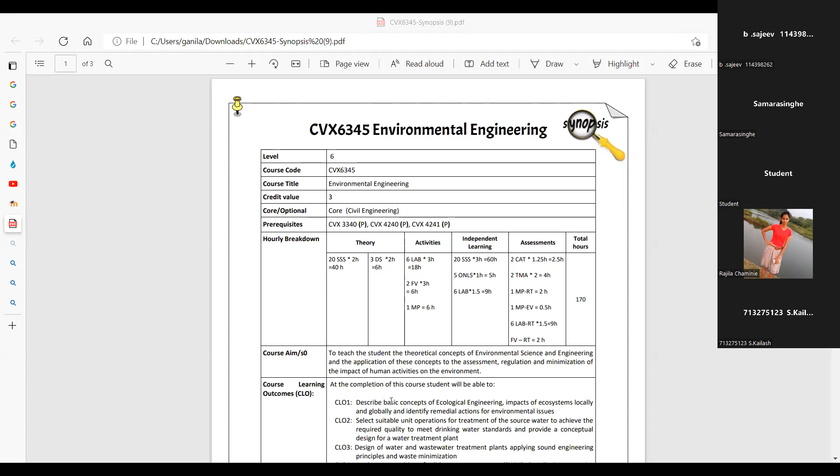Can you see the screen? Can you see the screen? Okay, now this is the course synopsis of your subject, right? I don't know how many of you have seen this. Now, under this, there are several things that you need to do, right? Now, the one thing is to have CAT exams. You can see here, CAT exams.

Then you have lab classes, right? Nearly, I think about 10 experiments we will do to give you an understanding about the subject. Then everybody will have to do a mini project. So you will have to select a topic, an environmental engineering topic, and you will have to perform a mini project and you will have to submit a report.

Then there is a field visit. Last time I had to do it virtually. I had to make a video and do it virtually because of COVID. But this time, due to practical issues like fuel issues, things like that, again, we may have to do it virtually. But I prefer to do it physically because it could benefit many of you. So after doing this field visit, you will have to submit a field visit report.

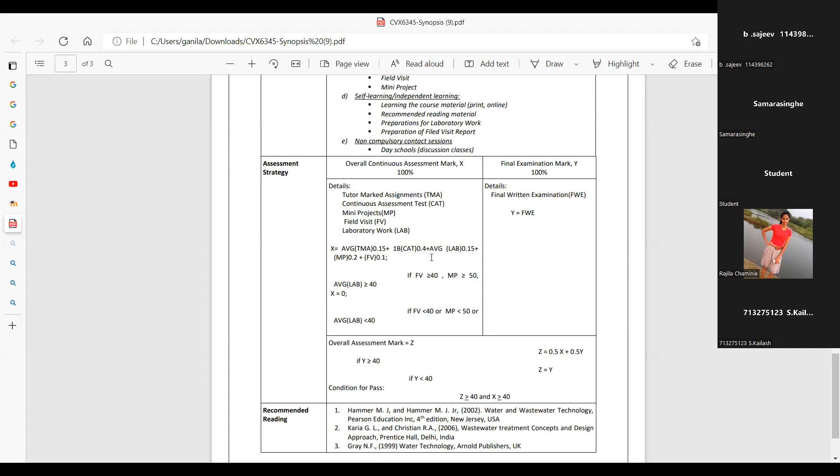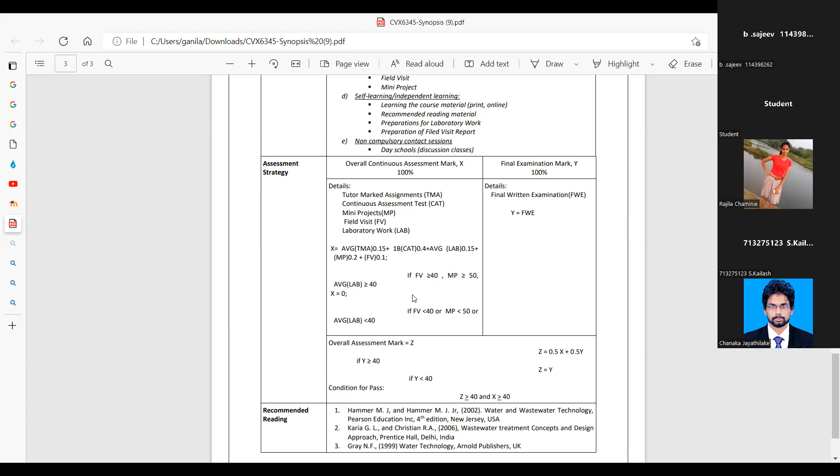So it's not a joke, right? So you have a fair amount of work, you have a fair amount of individual work, and you have to submit. Now, regarding the mini project, I will be giving you a few topics. You can select one topic out of that, and you will have to inform me the topic that you have selected, and I'll give you a deadline to submit.

I think the deadline is already there in the activity diary. I have put it this time. You can see it. Then also there is a deadline for the field visit report. Then there are deadlines for laboratory works. You have to submit on deadline.

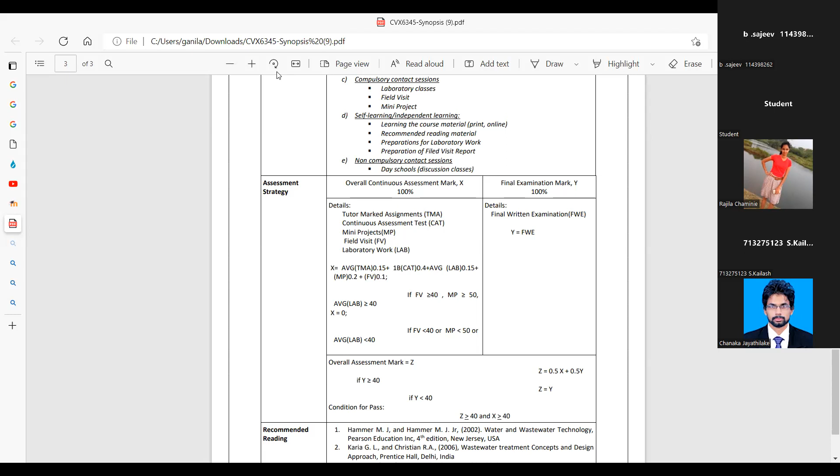This is quite serious. Why I'm saying is that you are supposed to become engineers, so you have a fair amount of working people here. So you know the significance of submitting things on time, right? Now, if you are submitting bids, if you are completing projects, it's quite important to achieve deadlines. So for the freshers who are doing here, who have no work experience, this will be a good exercise.

So I don't need any excuses, I have that and this, because we are going to announce these deadlines far ahead, right? You will have plenty of time. Do not wait until the last moment to submit things, because your deadlines will be deadlines, right? We won't have time to entertain. We are on a very rush program, and please be professionals and try to submit things on time, right? So I'll get into the subject.

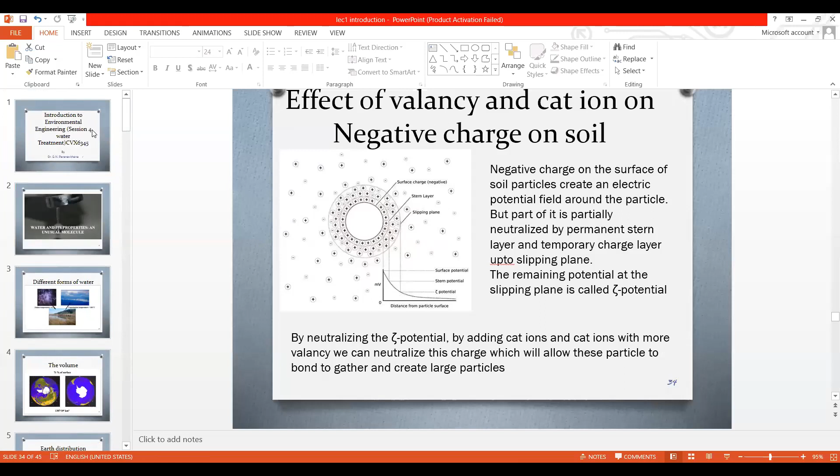Can you see the screen? Can you see the screen? Yes, sir. Yes, sir. Oh, okay, good.

Now, your block 1 contains the ecological aspect of the subject. I will do it later. Definitely, I'll do it within the coming 1.5 months. But I thought of starting it from session 4, water treatment, because it's a very significant and a lengthy session, and especially for you to get the feeling of the subject, I thought of starting the course from this session.

Apparently, I would like to know how many of you are from the water board or any water resources board or irrigation department. Could you please raise your hands? Again, I can see. So I think a few are there, right? So I can see few people are there. So this will be very important for you.

Now, basically in this subject, we will be mainly talking about water, and besides water, we will be talking about air and noise as well. Now, water is a very interesting substance. Without water, we will not survive in this world. Now, water contains very unique properties. Because of this uniqueness of water, life on Earth evolved. That is what scientists say. And because of these unusual properties, it also has a very high tendency to become polluted.

Now, if you look at the temperature of fusion and vaporization of water, it has a fairly high range. Water fuses at 0 degrees centigrade and vaporizes at 100 degrees centigrade. This temperature range from 0 to 100 is quite significant for life to flourish. And without this temperature range, scientists say that the living things on Earth would have never begun. So we will further move into that.

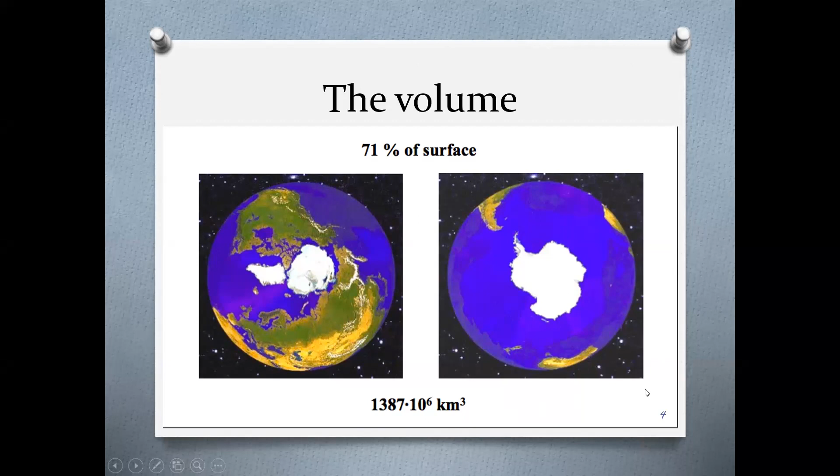Now, out of all of this water, we can use a fair extent of the river water available. We can use lake water. We can use some amount of groundwater, not all. Then glaciers and polar caps, we are unable to use that much. Then of course, ocean water.

Nowadays, we are having treatment systems to use it, but they are fairly expensive. So you can see out of the total available water, there is a very small quantity of water available for human consumption. So it's not a joke. If we run out of water, we cannot survive. In fact, in the coming few decades, there will be war on water. And you can see in the internet the predictions by scientists. So it is fairly important to preserve water and to keep it clean.

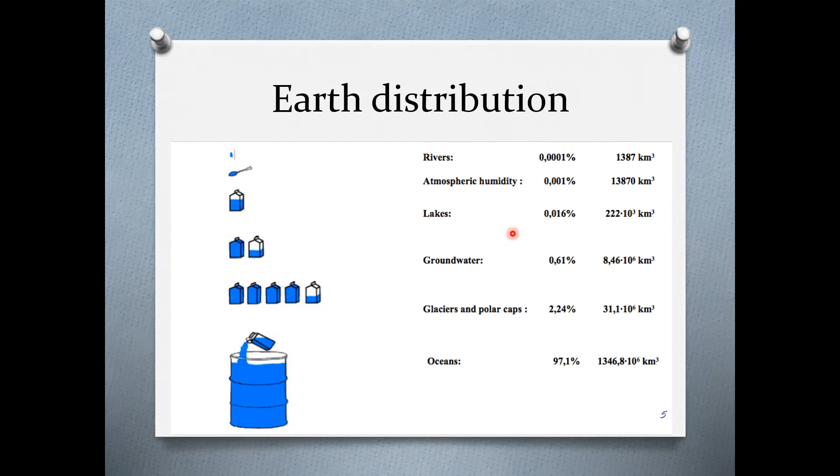Now, I will briefly talk about the hydrological cycle or the water cycle. Hope you have studied this from grade 6 onwards. In fact, we are studying about the cycle in detail at CVX6345.

Can somebody raise your hand if you are doing both 6345 and 4241? Are there any students who are doing both these subjects? No? Okay, good. Now, okay, 6 participants raise hand.

So what we are studying under engineering hydrology is about this hydrological cycle or the water cycle. So we will be talking about that tomorrow. I'll be having a day school tomorrow for hydrology.

Now, if I talk about this hydrological cycle briefly, the cloud formations are there. Clouds get densified and provide rainfall. And this rainfall will be captured by the surface. Part will run on the surface, part will go beneath and will flow laterally to the earth's surface. We call them subsurface flow or interflow. Then part will reach the groundwater table. We will be talking about groundwater table and the type of aquifers and various things under that subject.

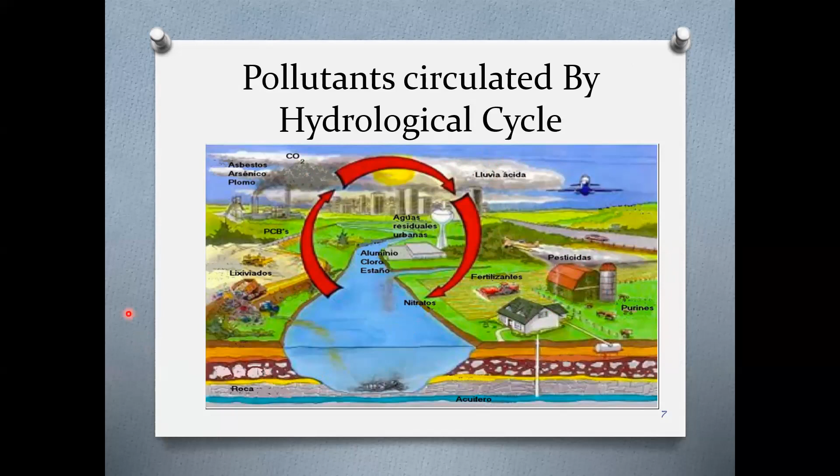Now, this is what I just discussed before. The pollutants can travel with the water cycle. You can see if you dispose contaminants to the ground, it can percolate or infiltrate into the water tables, it can contaminate the rivers, and it can evaporate and contaminate the clouds. If you pollute the air, the polluted air can be trapped in the clouds, and pollutants can come down with the rain, can harm your farm fields, can harm your health, can harm your food supplies. So they are all interconnected, right?

Now, let us briefly talk about the sources of water pollutants. If you look at the sources of water pollutants, you can basically categorize them into two categories: natural and anthropic origins. Natural, of course, you know what natural means. Anthropic means human-based or human-produced origins or human-created causes.

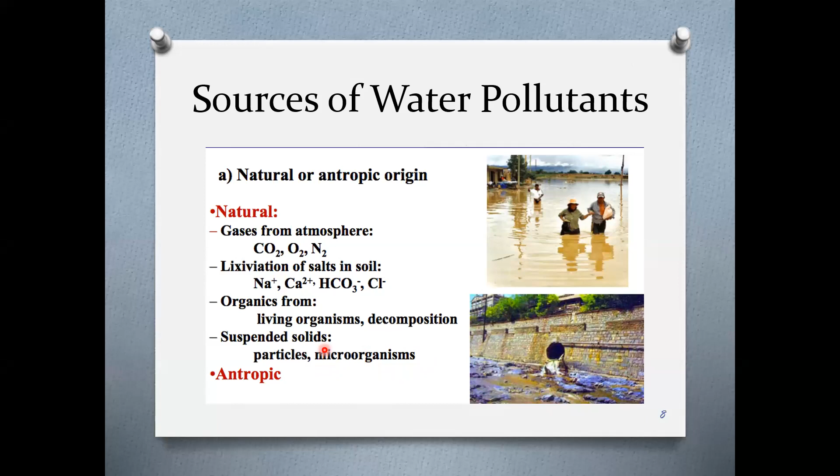So, when it comes to natural sources, especially gases from the atmosphere, and then lixiviation of salt in soil, this is accumulation of these ions, cations and anions, on soil. Then organics from living organisms, decompositions, things like that will produce pollutants. Then when rainwater erodes surfaces, it can create suspended solids and particles, and harmful microorganisms could be captured in these particles.

Then when it comes to anthropogenic reasons, we do these basic activities with water, industrial productions. Then we do discharges from municipal and domestic wastewater. Then we have discharges from farming and fishing. And you can see the contribution from each sector to the pollution. In fact, industrial production contributes 20% of water pollution. Then municipal and domestic wastewater produce 10% of water pollution. Then the major cause of water pollution is farming and fishing activities.

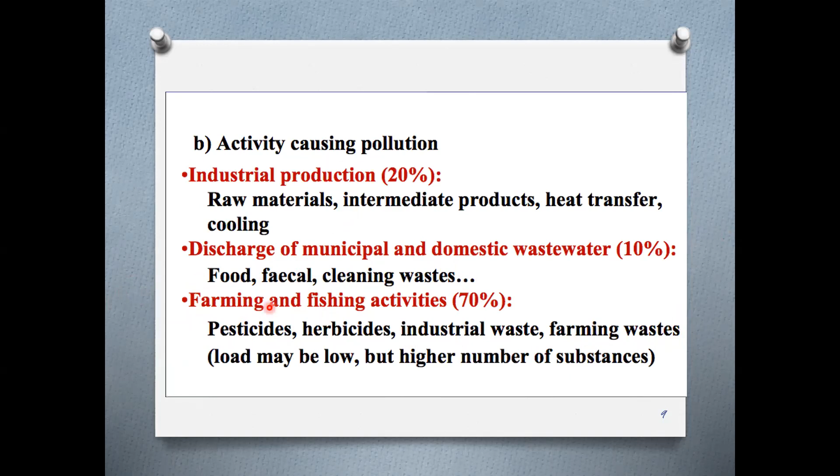Now, especially in industrial production, the formation and extraction of raw materials, then the intermediate production, the heat transfers to cooling and cooling towers, you know what is happening at Norochcholai, things like that can be considered as pollution for water. Then discharges from municipal and domestic wastewater: the food, fecal and cleaning waste. Fecal means our night soil contaminants can create water pollutants. Then from farming and fishing, especially pesticides, herbicides and industrial waste, farming waste create pollutants to the water cycle.

Now, if you look at the type of sources based on the geographical origin, we can divide them into two categories. The one is called point sources. The other one is called non-point sources. Now, point sources, for example, localized industrial discharges. You might have a factory which uses water and produces wastewater. It might be discharging that wastewater at one location. So it is at a point. So the pollutants are coming into the environment at a point. So those sorts of sources are called point sources.

Now, when you go into non-point sources, especially fertilizers and herbicides, especially agrochemicals, they are non-point sources. When you apply them to the environment, the pollution can take place at several locations. So you cannot pinpoint one point. So that's why we call them non-point sources. In fact, dealing with non-point sources is much more difficult than dealing with point sources.

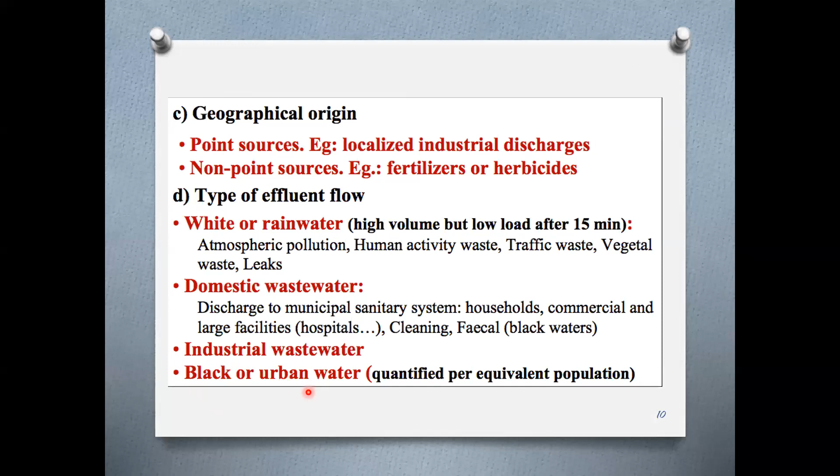Then when it comes to black and urban water, black water is specially used for water that is contaminated with fecal matter or urine. So those are called black water. Now, let me summarize the water pollution that we were talking about. Water pollution can be in the form of fuel and oil discharges. Then it can be in the form of domestic, agriculture, food industries, and then it can result from agricultural products, pesticides, fertilizers, then heavy metals and industrial waste can cause water pollution.

So these are the basic effects of these different categories of contaminants. Then flotation and low degradation due to these types of pollutants, then deoxygenation, the removal of dissolved oxygen from water, can take place due to this type of waste. Then lake eutrophication can take place due to this type of waste. Then, of course, the water can become very toxic and very harmful if we have this waste in the water.

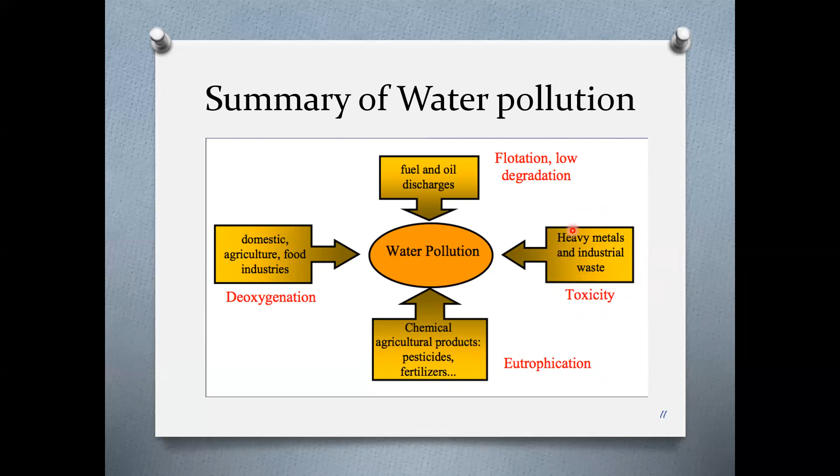Now, let us briefly talk about the objectives of this session. The objectives of water treatment for domestic consumption. To provide water free from these factors: visible suspended matter, color, taste and odor, objectionable dissolved matter, bacteria indicative of pollution, aggressive constituents. Now, why don't you like visible suspended matter? Would you be willing to drink water with a lot of suspended matter? No, right? Nobody is willing to consume or use water with a lot of suspended matter. So that's the issue.

Then color, odor, and taste. It should not have undesirable color, taste, and odor. Then it should not have objectionable dissolved matter. We will be talking about dissolved matter later. It could have certain chemicals dissolved in it which could harm our health. So it should be free from objectionable dissolved matter.

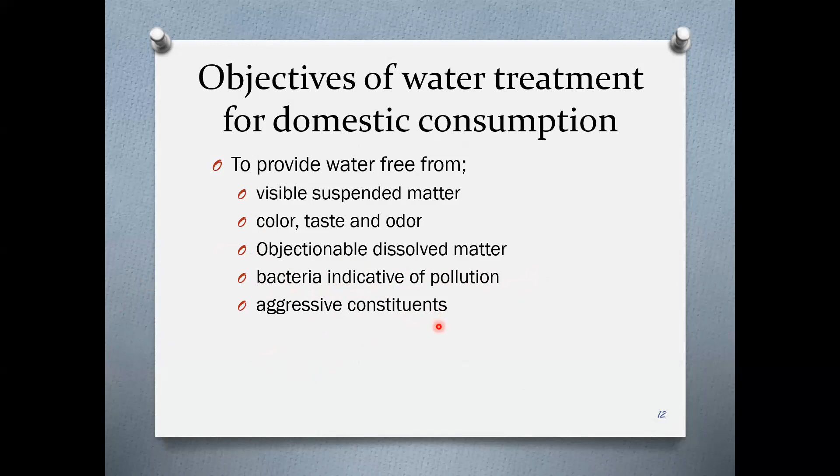Then bacteria of harmful nature, or indicative of harmful substances, should not be there in the water. Then aggressive constituents, the things which react fast. Let's say alkalinity, acidity. If you have too much acidity, it will corrode your equipment, your utensils. Now, let us briefly talk about the ways and means of measuring pollutants.

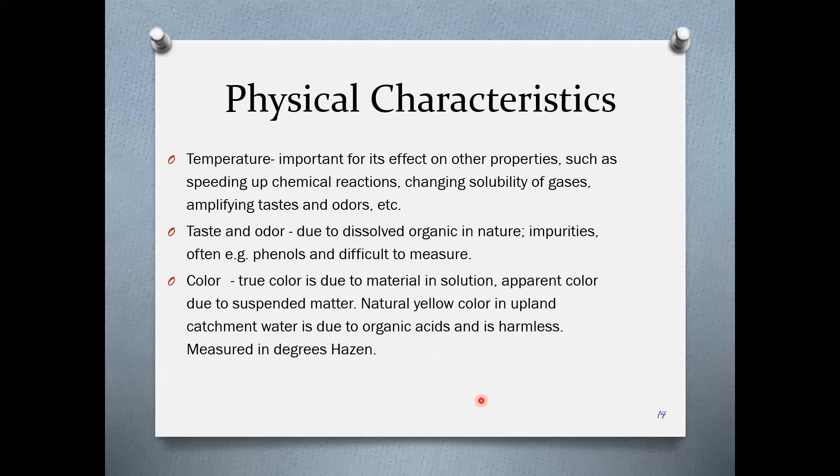Now, let us talk about the property turbidity. Turbidity is a fairly significant one, and we do a fair amount of work to reduce turbidity in water treatment. Colloidal solids give water a cloudy appearance, aesthetically unattractive and possibly harmful, maybe due to clay and silt particles, sewage, industrial waste, or microorganisms. Turbidity means unclear water. It is not transparent, you cannot see through it. When the transparency goes down, the turbidity goes up.

So it's a fairly important one, because if the water is turbid, it could mean it is containing any of these substances. And if it has mud particles, the problem is that they can hide harmful bacteria and viruses. So it is very important. In fact, in a treatment chain, there is a significant component dedicated to removing turbidity.

Well, the other parameter is electrical conductivity, which depends on the quantity of dissolved salts and is approximately proportional to TDS, total dissolved content. This TDS refers to the salt content in the water. If the electrical conductivity is very high, it can have very high total dissolved solids. If the dissolved content is very high, it could harm our crops, our soils, and ultimately ourselves. So measuring electrical conductivity is also fairly important.

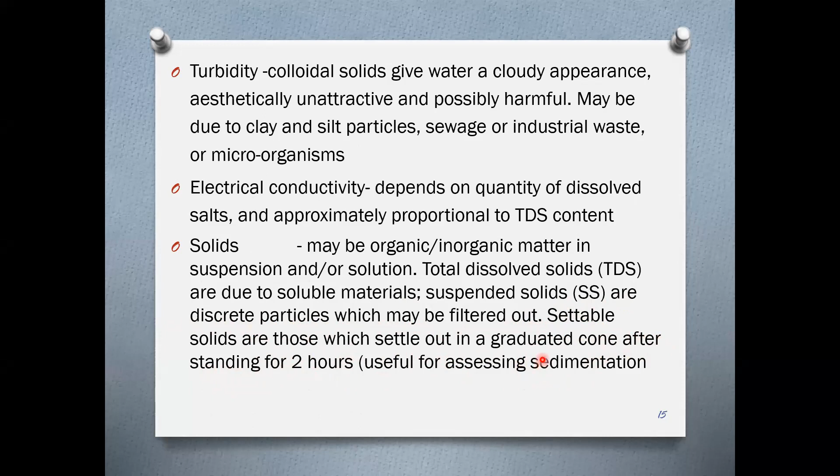Now, let's go into chemical characteristics. pH, of course, indicates the alkalinity and the acidity level of water. Alkalinity is due to the presence of bicarbonates, carbonates, or hydroxide. It is useful as it provides buffering to resist changes in pH. Now, if you have high alkalinity, it could resist changes, right?

Then acidity, especially if water becomes acidic, if you have too much carbon dioxide dissolved in it. When you dissolve carbon dioxide in water, it will create carbonic acid. So basically, these sorts of ranges are present in natural waters. Then there is an acidity called mineral acidity. This is usually caused by sulfuric, hydrochloric, and nitric acids, and would normally be due to industrial waste.

Now, if you have industrial wastewater discharges into water, if the pH level is below 4.5, it's a clear indication of industrial contamination. Normally, it is measured in milligrams per liter equivalent to calcium carbonate. Now, when it comes to hardness,

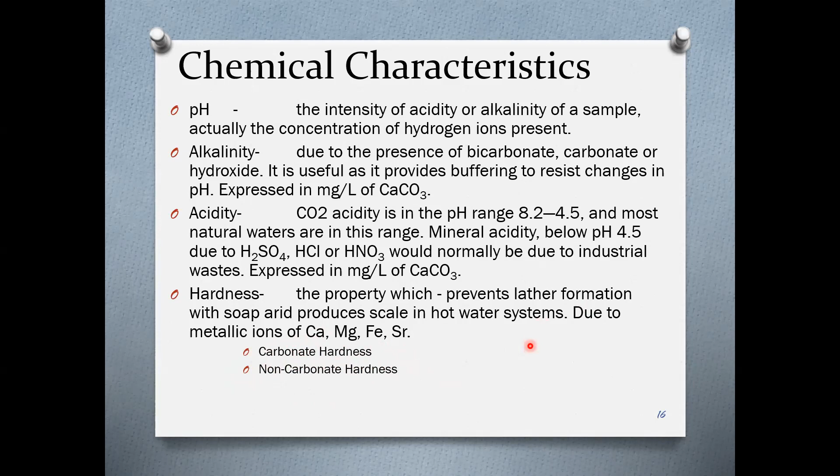Hardness is of two natures, carbonate hardness and non-carbonate hardness, which we might be dealing with extensively later. Carbonate hardness means the hardness by cations with anions, carbonates and bicarbonates. Non-carbonate hardness means chloride, nitrate, and sulfate hardness. So further, these chemical characteristics are going to be there.

Then this one is a very significant chemical parameter, dissolved oxygen, required for maintaining higher quality of biological life in water. If the dissolved oxygen goes below a certain level, the fishes and all the other living beings in that water will die. So it is fairly important to maintain very high dissolved oxygen. Further, in drinking water, if you have a high amount of oxygen dissolved, it will prevent other substances from occupying interstitial spaces, right?

Now you have water molecules, and you have interstitial spaces among these molecules. If you have a high dissolved oxygen level, it will reduce other substances getting dissolved and getting into these interstitial spaces. The other thing, dissolved oxygen will improve the taste of water. Then nitrogen, it is present in 4 different types. You can read it from your notes, and it will come up later.

Then chlorides give a brackish taste and may be an indicator of sewage pollution due to the chloride content of urine. If you have a high content of chloride, it means it has a definite sewage contamination. It is detectable at about 250 milligrams a liter upwards.

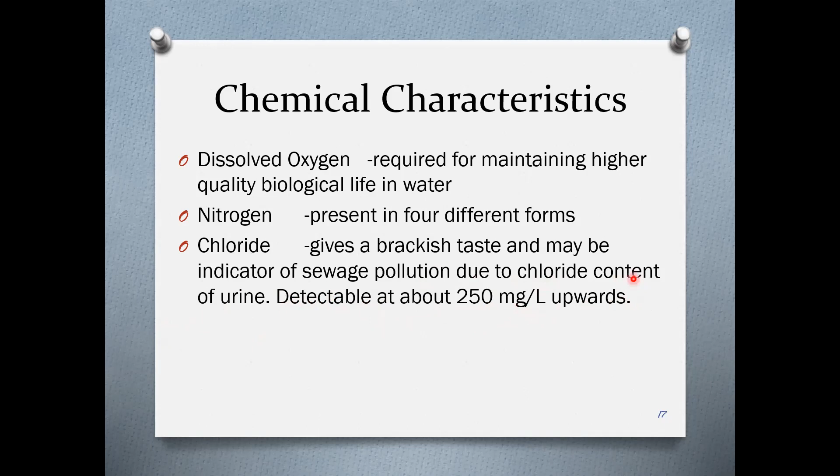Now, before moving into water treatment systems, we have to discuss a few things about forecasting water demand. In order to design a water treatment facility, we should predict the future demand for water caused by population growth. There are two models to predict the future demand, namely the linear model and the exponential model.

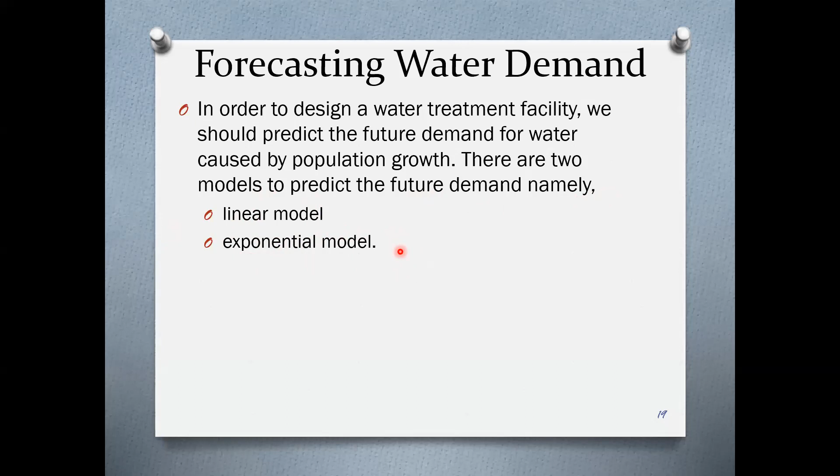Now, when you are making a water treatment plant, you have to make a water treatment plant to cater future demand. So you have to decide whether you are going to get 30-year predicted flow demand or 25-year predicted demand. But to predict, there are two types of models. One is the linear model. You can see the linear growth with years. And this one is the exponential model. I have taken down this section from the design manual of the water board. And you can see, basically, we generally use this exponential model.

Now, if you look at the exponential model here, Pn equals P into 1 plus R to the power N. P is the base population. Let's say we are talking about 2022. If the population is 100,000 in the command area, you can apply this equation and find the population in 30 years time. So this R is the growth rate. It was given as 2.3, and the manual that I was using was a pretty old one. In fact, these growth rates have come down significantly. I think it's close to one or something in Sri Lanka now.

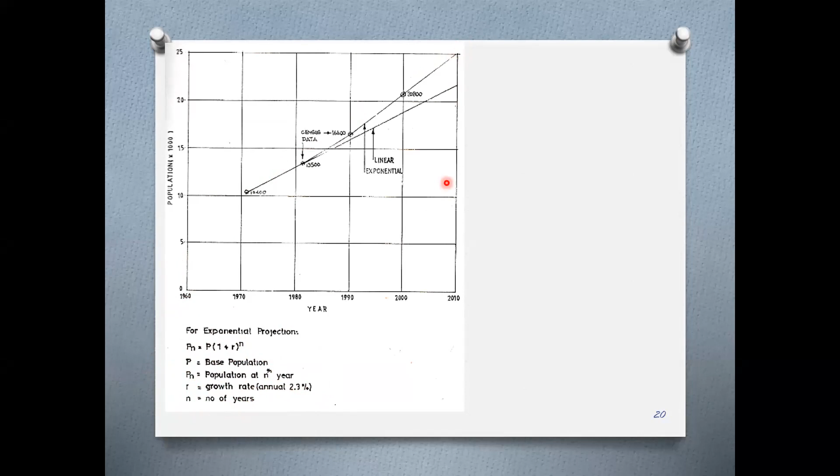Then you can substitute the number of years. So you can predict the population in 30 years or 25 years. For that population, you have to design the water treatment plant, your water treatment system. Then, steps in determining the water demand. There are several steps in determining the water demand. Now, the first step is to select a per capita water demand.

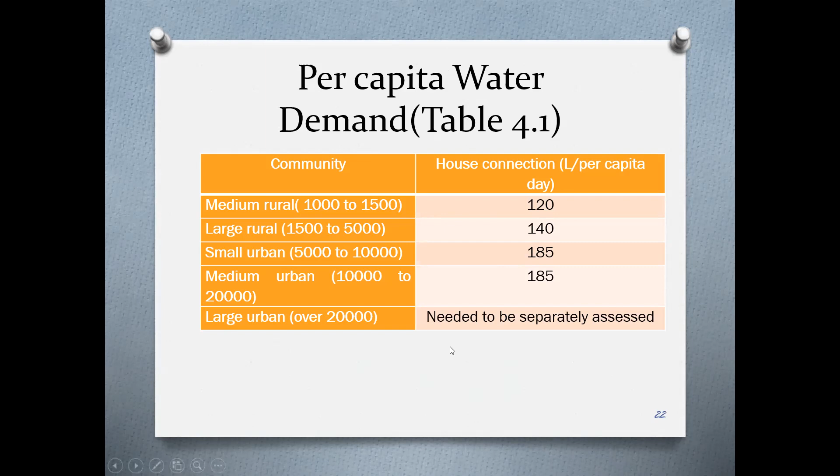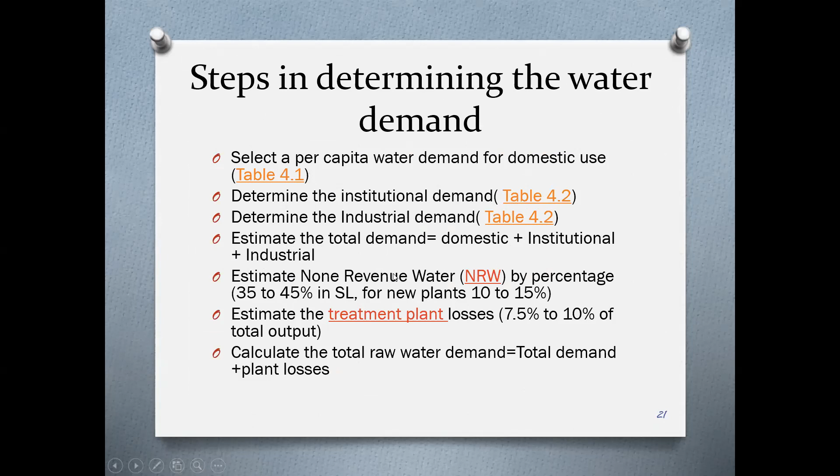Then you have to estimate the total demand. You have to add the calculated one for domestic consumption. Then you have to add the calculation for industrial. Then you have to add the calculation for institutional. So you will get the total demand. Now, on top of this total demand, you have to estimate the non-revenue water. Now, this non-revenue water is an interesting thing. I will talk about it.

Now, I'm quite sure you have experienced such things in our water system. You might have experienced water leakages in our systems. These are all non-revenue water. What do you mean by non-revenue water? It does not generate any revenue to the institution or the government. These are just leakages. For example, I know some time back at Peradeniya University, the water bill during the holiday months and working months was the same. You cannot have a water bill during holiday months and working months the same.

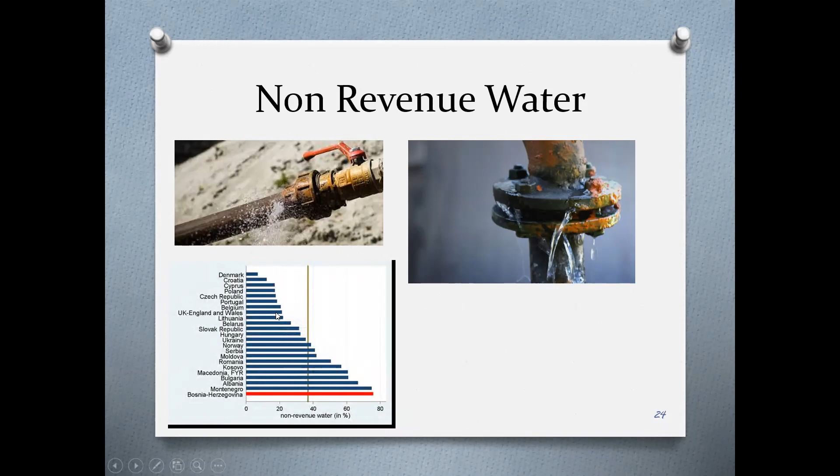Then I will move into the water treatment plant.

For that, at this moment, I would like to take a 10 minute break. I will try to share a video for you. Please watch during this 10 minutes time. 1 second, please.

Okay, I'll share this small video. Please watch for a break.

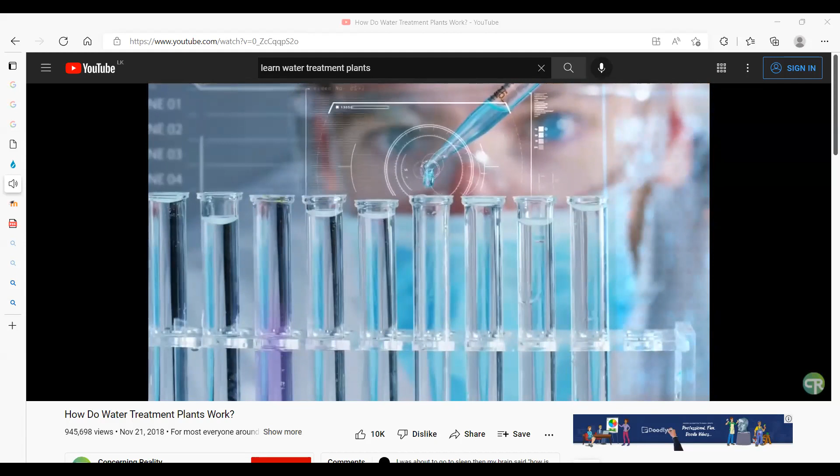The question still remains, how exactly does one treatment plant take dirty river water or well water and turn it into water that is safe to drink? It involves a lot of processing, using chemicals, filters, and removing all of the toxins and hazards from a given source. The entire process starts with something called coagulation and flocculation.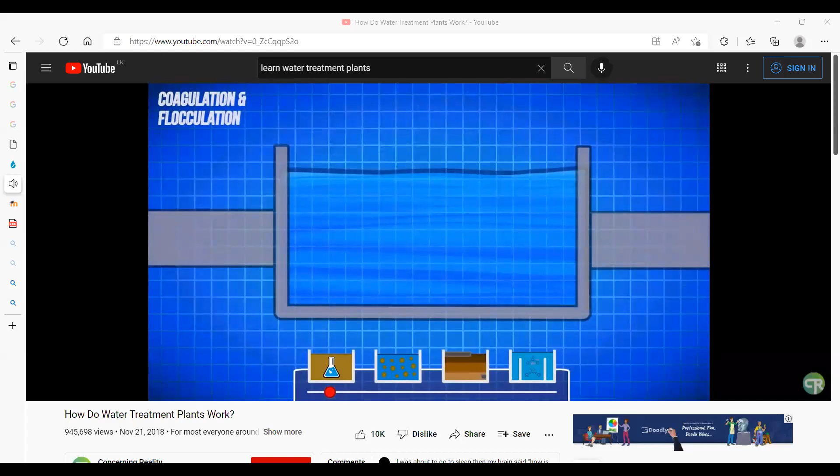All drinking water has to come from somewhere, usually being freshwater lakes, rivers, wells, or streams. In these water sources, there's going to be some amount of sediment as well as organic materials in the water. These particles of sand, bacteria, dirt, wood, etc., they all have to be removed before the water can be sent out to city residents. To do this, chemicals called coagulants are added to the water.

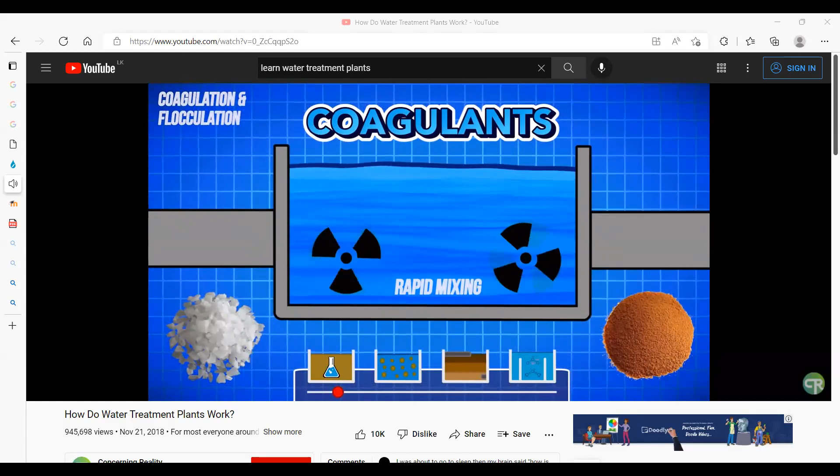These chemicals, such as aluminum sulfate or ferric chloride, work to help the particles in the water congeal together. Essentially, these chemicals have the opposite charges of suspended solids, like clays or silts. When combined, the charges of the particles are neutralized, allowing for them to stick together.

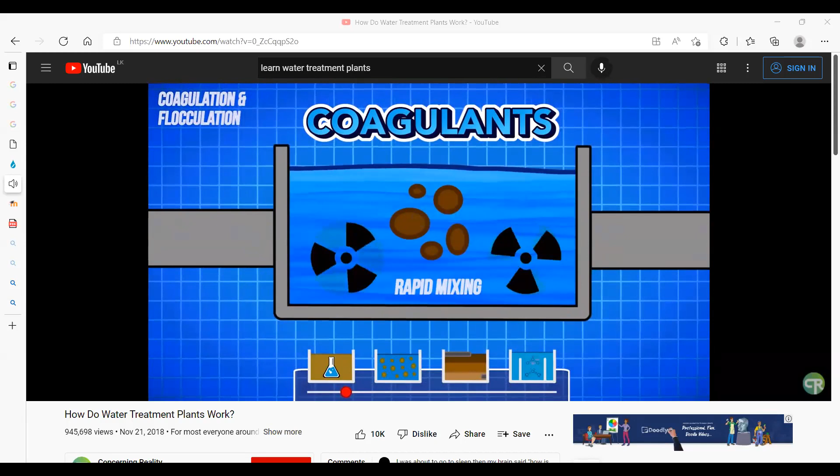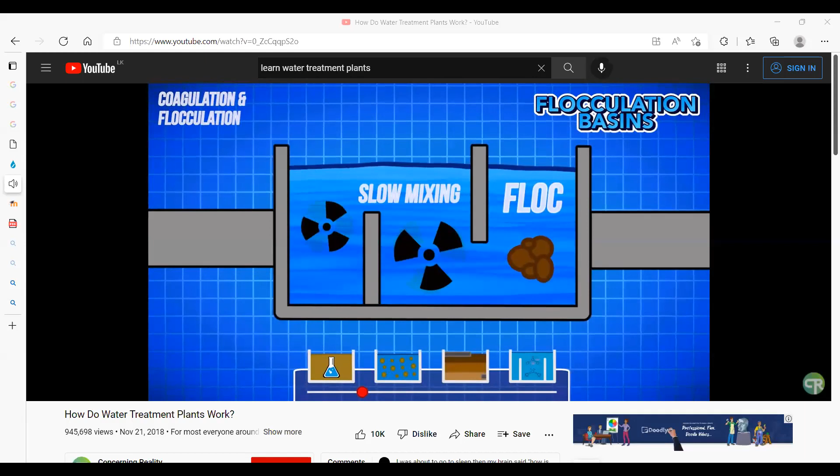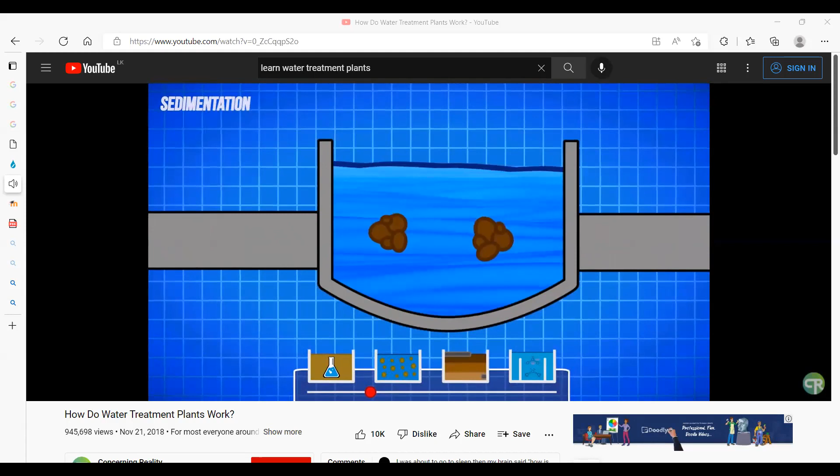Coagulants are often added to the water right at the inlet of a drinking water plant, where the water then goes into mixing basins called flocculation basins. In these basins, the solution of water and coagulant will slowly be mixed together to form what are called floc particles. After mixing for a set amount of time determined by water quality in the flocculation basins, the water is moved to sedimentation basins. It's in these holding tanks where the water sits for the floc particles to begin settling out at a faster and faster rate, which is the intended goal of this process.

By simply adding and mixing these chemicals into the water and letting that water sit, a large portion of the sediment will settle out to the bottom as sludge, which can be taken away to a landfill or holding facility. The floc particles are ultimately removed from the bottom of basins, and the clean water, being the cleanest at the top due to the settling particles, flows over weirs to the next stage in the process.

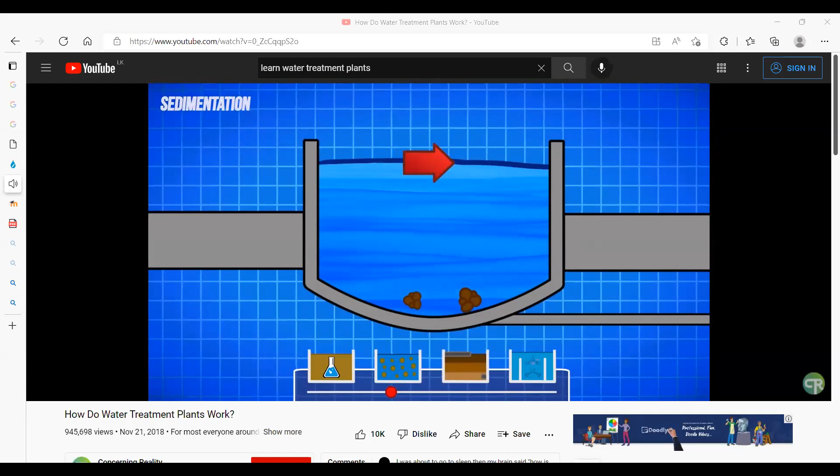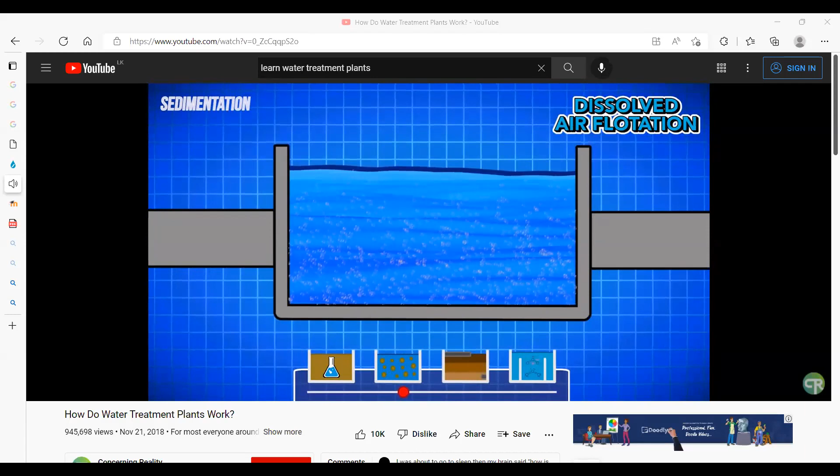In some plants, engineers actually use dissolved air flotation tanks in place of sedimentation basins. In these cases, air is pumped into the bottom of the tanks, creating a cascade of tiny bubbles. As these bubbles float to the surface, they take floc particles with them, forming a film of floc on the surface of the tanks. Then, a sweeper arm pushes the floc into a collection basin where it's taken to a handling facility. In dissolved air flotation tanks, the clean water is taken from the bottom, where the least amount of floc is.

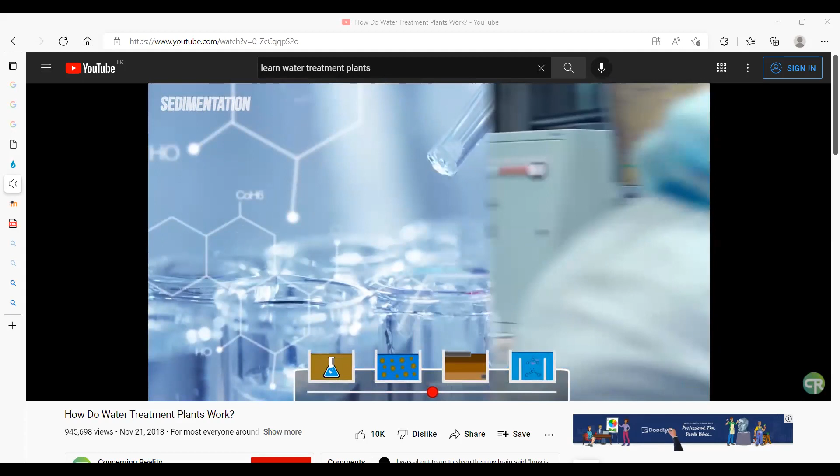When it comes to designing water treatment plants, engineers will vary techniques based on the water source and how they want their final water to taste, feel, or otherwise be treated. The only regulation is the quality of water being pumped to the city, and in most cases, it doesn't matter how plants get the water to that point, which allows civil engineers a lot of creative freedom in the process.

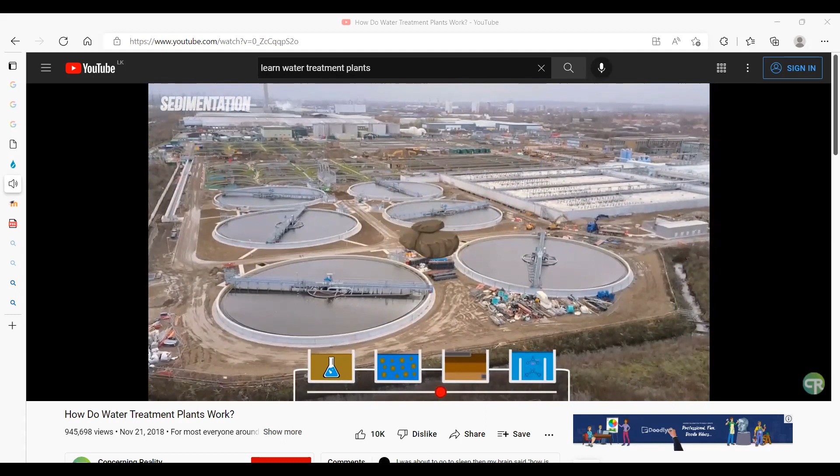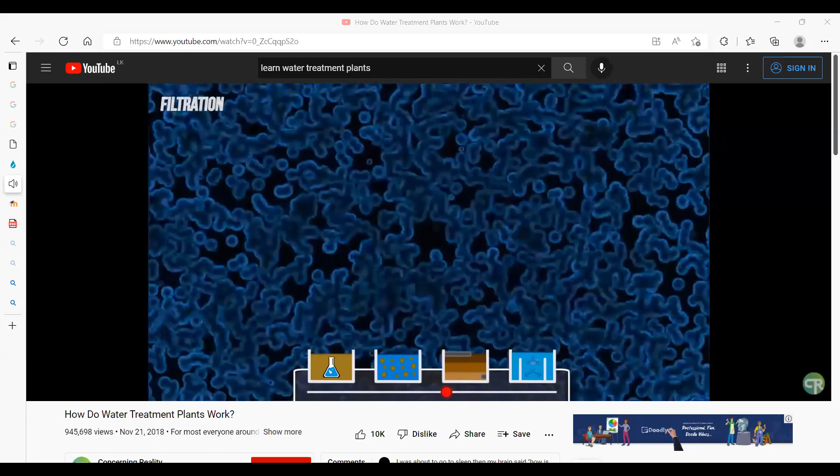After the majority of solids are removed from the water during coagulation and flocculation, followed by sedimentation, the water flows over weirs to the next step, filtration. The water at this point will start looking clear, but there will still be bacteria and very small suspended solids in the mix. The filtration process will seek to remove the remainder of the suspended solids and bacteria to further bring the water up to snuff. Nearly every potable water treatment plant will use a sand filter for this process.

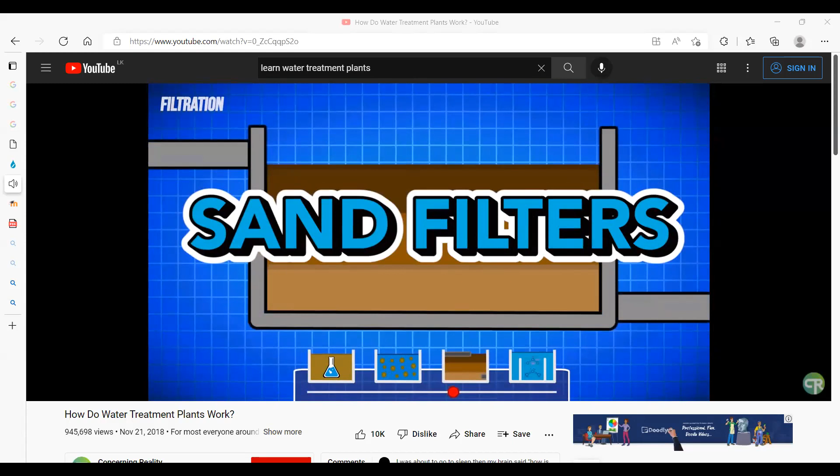Even in plants where engineers may not think it's needed, often sand filters will be added simply for extra measures to ensure clean water at the end. Sand filters are exactly what they sound like, a basin of fine to coarse sand that filters water. It would theoretically be possible to treat drinking water with only sand filters, but that would result in frequently clogged sand filters, resulting in lower efficiency and more cleaning time.

These sand filters can be set up in essentially two different ways. Either the water flows from the bottom and exits the top, or the water flows from the top and exits the bottom. Each layout presents its own set of unique problems, but the most common technique is actually for the water to flow from the top to the bottom. Sand filters aren't highly technical. Water just passes through them and particles get caught as they run out of space to flow through. However, while not highly technical, sand filters are highly efficient.

Water flowing out of sand filters will need to have a clarity of around less than 0.3 nephelometric turbidity units, or NTU. Try saying that 3 times fast. Or whatever local code is used for water clarity. This measurement is essentially just a way to determine the number of particles still remaining in the water, or turbidity.

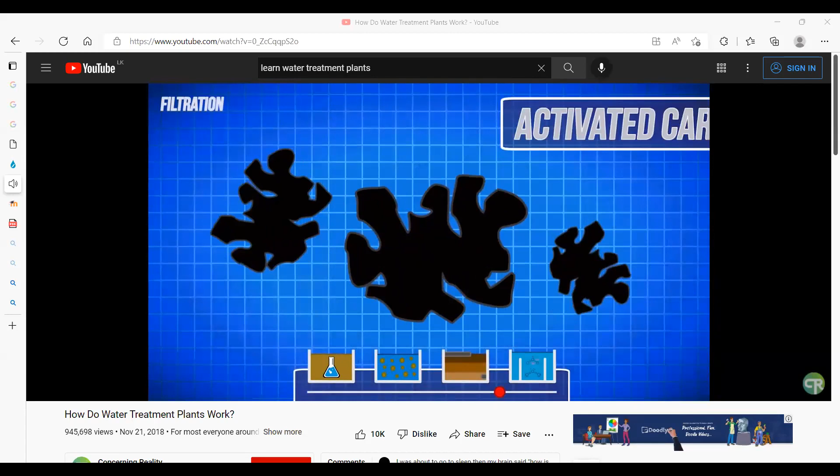Many treatment plants will also pass water through activated carbon basins, which you can essentially think of as giant Brita filter tanks. Activated carbon particles have hundreds of tiny pores on them that help remove the tiniest of sediment and bacteria. This process isn't wholly necessary, but it helps improve taste and odor, often a desired trait for city residents. At this point, the water should be mostly crystal clear, but there still remains some residual bacteria. That leads us to the next step, disinfection.

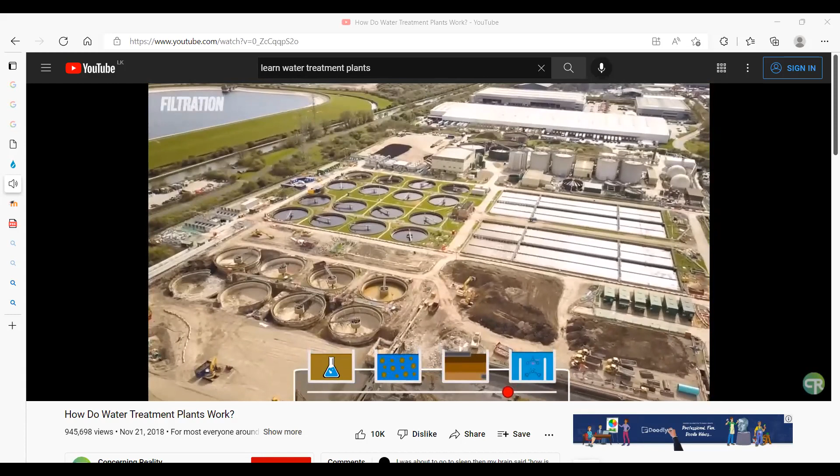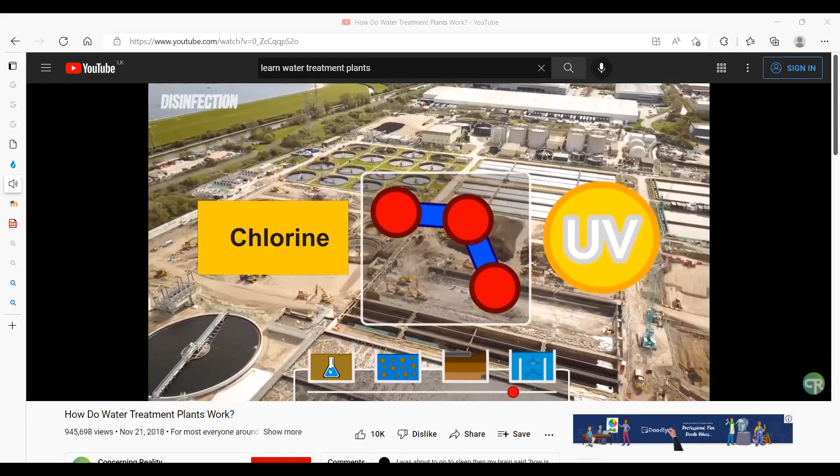There are 3 main ways of disinfection in the water treatment process, which can be used individually or in combination with one another, depending upon design. First, chlorine or chloramine treatment, there's ozone treatment, and finally, ultraviolet radiation treatment. In the US, the main method of disinfection is by adding chloramines, or chlorine-based compounds. These compounds, such as chlorine dioxide or monochloramine, work to kill microorganisms.

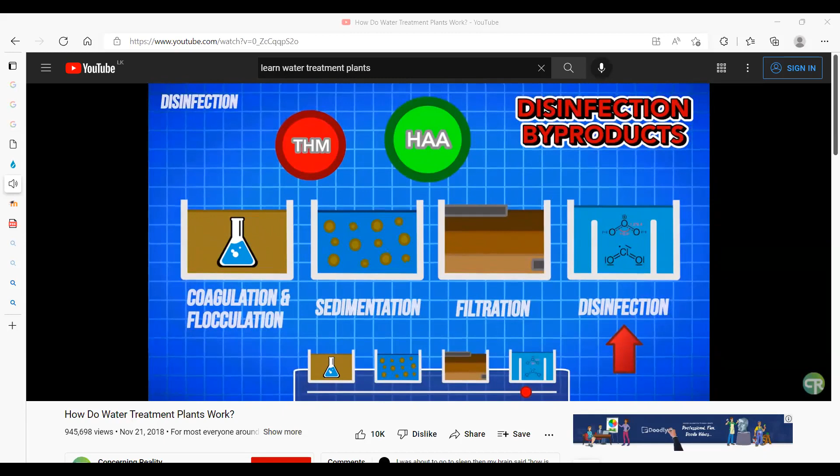One downside to this process, though, is that these chemicals can react with other organic material in the water to create disinfection byproducts. These disinfection byproducts are harmful to human health and have to be prevented or mitigated. This extraneous reaction with other organic material is also why chlorine disinfection must come at the end of the treatment process. If added at the beginning, an abundance of disinfection byproducts would be created, causing a plethora of issues for the engineers and plant operators.

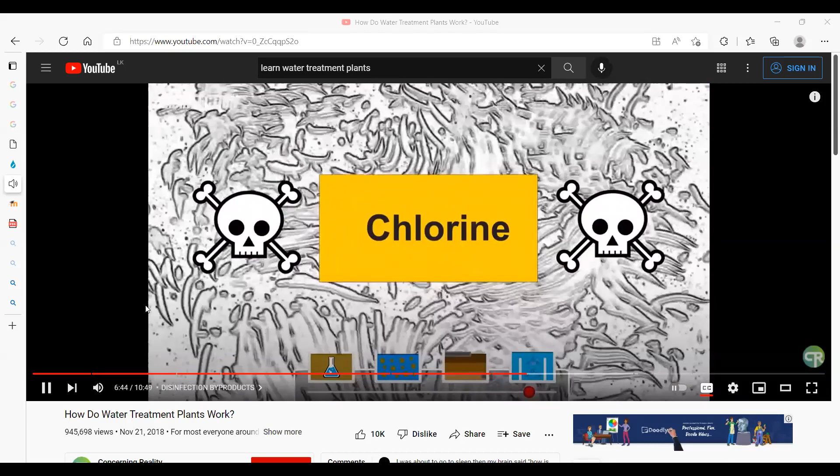Even with all of this, chlorine is used mainly because of how it kills pathogens. It not only kills any pathogens in the water at the plant, but residual chlorine levels also remain in the tap water, killing any contaminants that might get introduced after leaving the plant. Most cities or states will have maximum or minimum chlorine levels in the treated water in order to keep both the water treated and city residents safe.

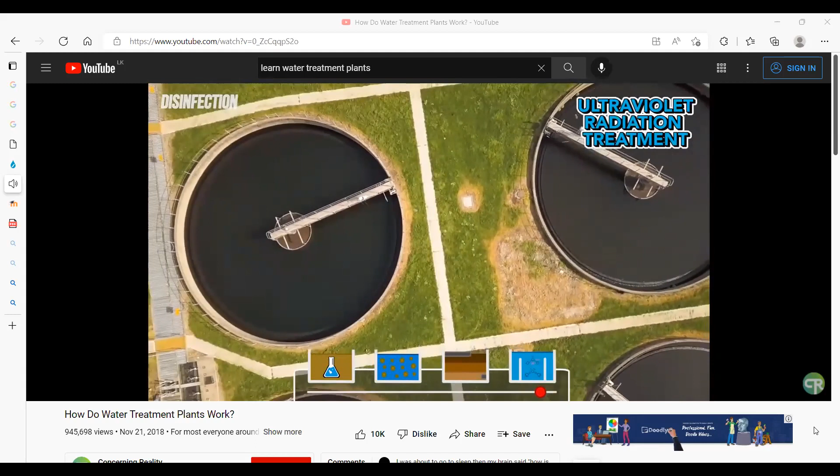The other most common method of treatment is ultraviolet radiation. In this process, UV light is shined through the water, which scrambles any bacteria's DNA. This doesn't kill the bacteria, but it makes it impossible for them to reproduce, thus making them harmless. The main downside to this disinfection process is that it isn't residual like the chlorine, meaning that any bacteria introduced to the water after this process can't be treated.

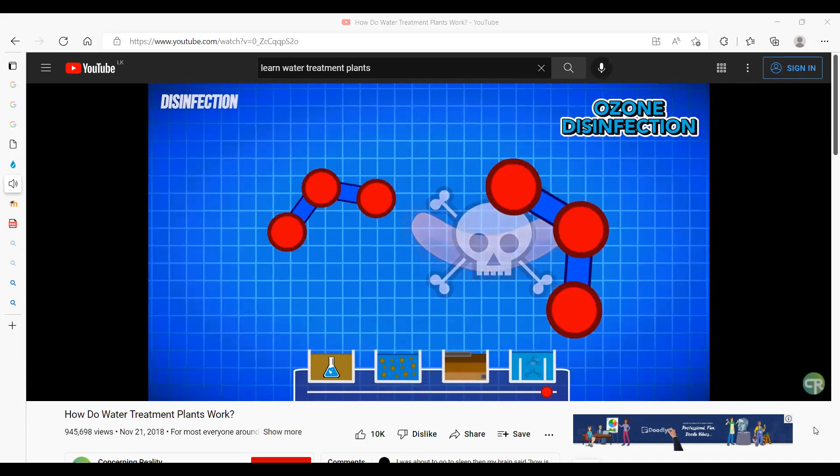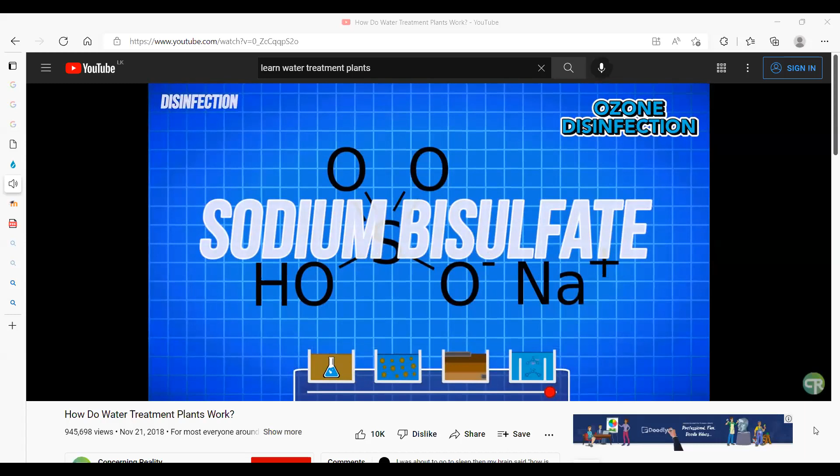Finally, we're left with ozone treatment. This process involves adding ozone, O3, to the water. Called ozonation, the ozone kills the bacteria in the water as well as improving the taste and odor. In most cases, this treatment process also requires that a chemical be used to remove any ozone at the end, such as sodium bisulfate, as not to cause any harmful effects to the city's population or anyone who might drink the water. After the water is treated, in any one of these 3 disinfection processes, it's ready to be pumped into a city's pipe network for delivery to your tap.

The water flowing out of a plant is tested for various levels of chemicals, particles, and other qualities all outlined in a plant's permit. This permit, set by the governing agency, regulates water quality and holds the treatment plant accountable in the treatment process. At this point, all the water is fit for human consumption per the permit, and the treatment plant is tasked with keeping it flowing through the pipes in your city.

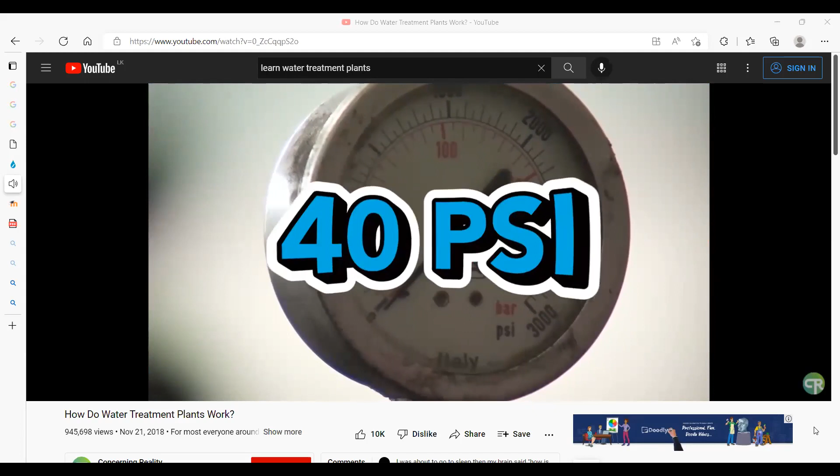Constant pressures of 40 psi must be kept at the outlets of the water in the system so that in areas of high elevation in the pipe network, the water retains residual pressure. 1 foot in water elevation is directly correlated to an increase or decrease of 0.433 psi. So as water is pumped throughout the city, its pressure at any given point of differing elevation fluctuates.

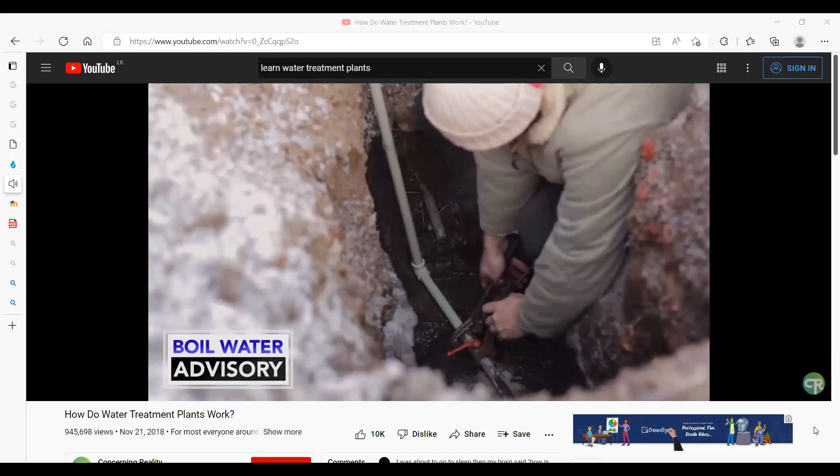Positive pressure always has to be achieved so as to not let any external water in the ground flow through pipe cracks or joints. This would contaminate the entire system and is one reason why you might experience a boil water notice. Essentially, that means engineers have reason to believe that somewhere in that city's pipe network dropped below the required PSI and water or contaminants might have infiltrated the system.

Massive pumps at the treatment plant supply pressure to the system through constant operation. Some of this pressure can be stored as elevation in water towers, which can give pumps a backup in emergencies or fire flows. In a lot of cases, water towers allow the pumps at the treatment plant to run at a constant rate, which increases efficiency and removes downtime problems. This combination of pumps and water towers allows your tap to remain flowing and otherwise allows you to live in the comfort of your own home.

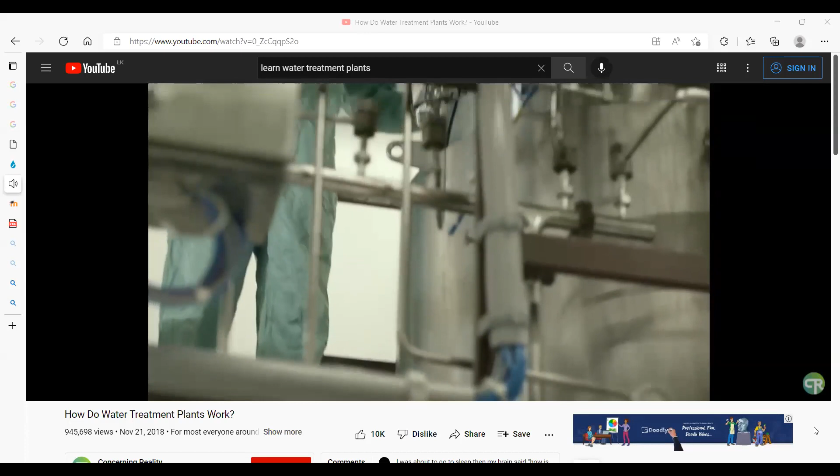Civil engineers and treatment plant operators work around the clock to provide clean water through water treatment plants. At this point, we've taken a look at the most common potable water treatment techniques, but there are tens to hundreds of other deviations we haven't discussed. This draws back to one of the coolest things about water treatment plant design. You're able to use any number of creative solutions to clean the water, and as long as it comes out clean, you've done your job well.

Don't forget about the thankless job of being a water treatment plant operator, though. These men and women work around the clock to keep treatment plants running 24/7 so you can always have fresh water. A lot of time, money, and effort goes into making sure that you can have that nice glass of water on demand.

Okay. Hope you have enjoyed that video. I'm quite sure it enlightened you on a few things about water treatment. It has briefly discussed water treatment, but there are so many steps involved in it, a lot of theories involved in it. Even this course covers the basics of it, not in-depth analysis. If you do a master's on this, you might come across in-depth analysis of water treatment.

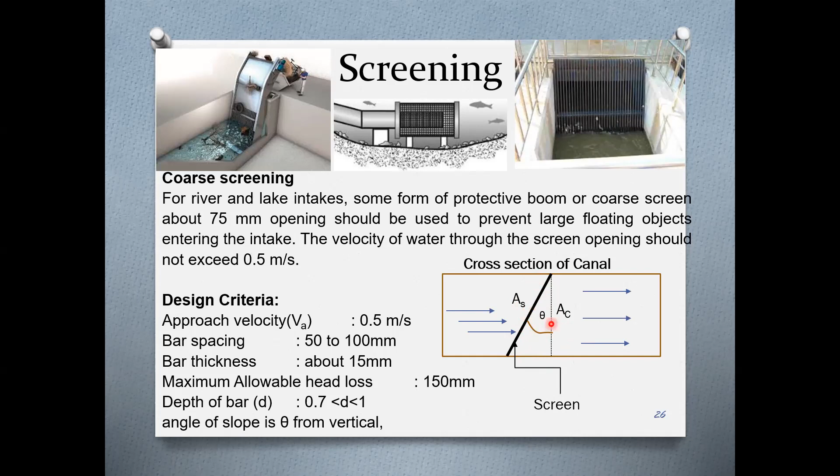Then let the canal cross section be Q divided by VA. The flow rate divided by the velocity will give the canal cross section. Then the screen cross section is AC sec theta. That comes from trigonometry. You can see if this is AC, if you want to get AS, it is AC sec theta. If you want to get AC from AS, it is AS cos theta, right? So in this way, it is AC sec theta.

Then void space ratio. There is a ratio called void space ratio, VSR, equal to the space between two bars divided by space plus thickness. If you calculate the cross-sectional area of the bars and the spaces, generally it will come up to this equation: space divided by space plus thickness. That is space over overall cross-section area.

Now, net area of the flow. When flow goes through this bar screen, it will not go through the area of the bars. Am I right? So basically, the flow will flow through the void spaces between these bars. The area of the void spaces is generally calculated as A net. A net is calculated by multiplying the total screen cross section by the VSR. The velocity through the screen is generally given as VB. It is obtained by flow divided by A net, the effective net flow area.

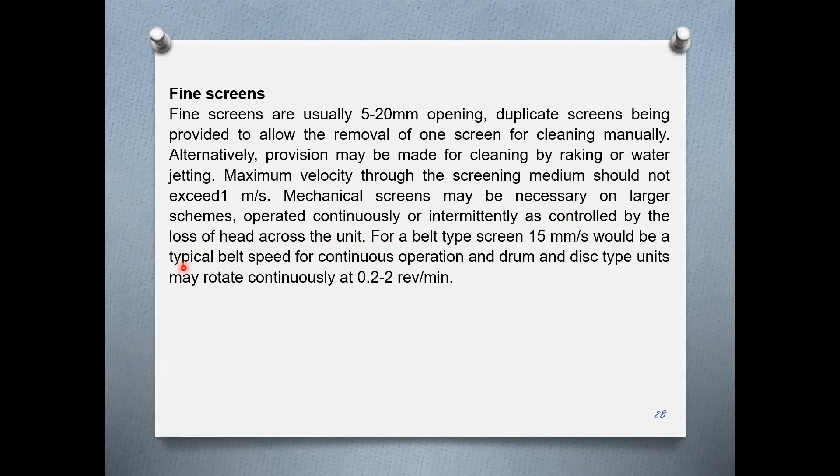Mechanical screens may be necessary for larger schemes, operated continuously or intermittently as controlled by the loss of head across the unit. For a belt type screen, 15 millimeters per second would be a typical belt speed. There is a belt. You can see this on the internet. Now this belt will go up and down; the screen is a moving belt. Water is going across that. So whatever is trapped on the screen will move and be mechanically removed.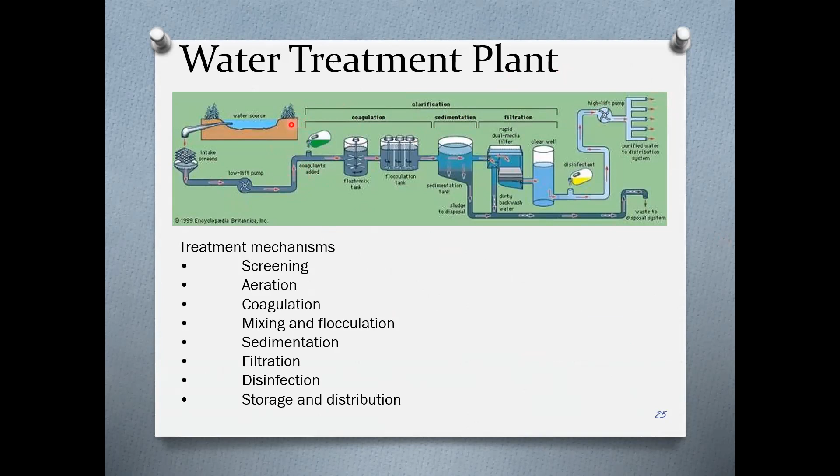Now we are coming into the aerators. Aeration is a significant part in Sri Lankan water treatment systems. Now before getting into this, what do you call this step? Clarification. Generally, we have an aerator before clarification, somewhere here. Unfortunately, in this system, it does not show aeration. For certain countries, aeration is not that required. But in the Sri Lankan context, especially in the wet zone, aeration is required.

Basically, water obtained from sources such as lakes, rivers, and deep wells needs to be aerated to achieve these things. First one, let's read. To reduce anaerobic water. Anaerobic water means the water contains a lower amount of oxygen and also contains foul gases like carbon dioxide, ammonia, and hydrogen sulfide. So when you do aeration, most of these undesirable gases will go out from the water and desirable gases such as oxygen will get dissolved in water.

The next thing is to increase pH above 6.5 so that iron and manganese can be removed and to reduce corrosivity in water. Now, if we increase the pH above 6.5, iron and manganese can be removed and corrosivity in water is reduced. So basically, you can reduce iron and manganese ions.

To increase the dissolved oxygen level, which is essential for drinking water to taste and smell good. I told you before that we need to increase the dissolved oxygen level to a desirable level so that it improves the taste and smell of water. This is caused by oxygen occupying spaces in water, preventing other minerals from occupying them. I told you about the interstitial spaces. If the interstitial spaces are occupied by oxygen, they will not be occupied by other minerals, right?

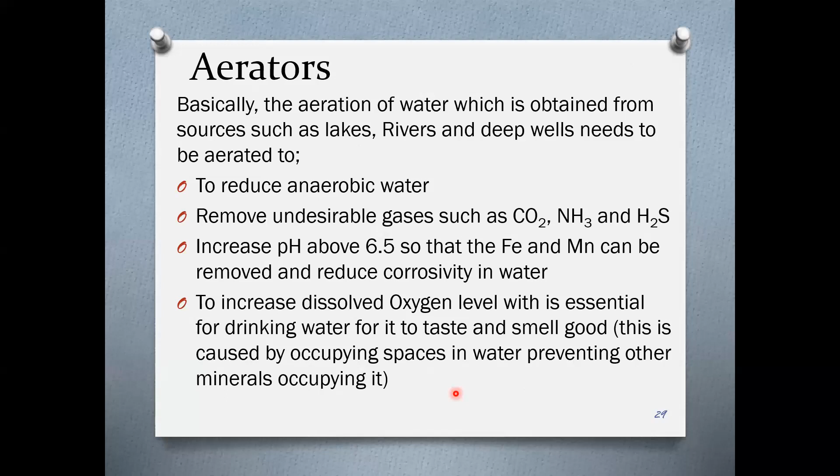I will move into the types of aerators. Basically, there are three types of aerators, namely spray aerators, multiple tray aerators, and cascade aerators. When it comes to cascade aerators, multiple platform aerators and step aerators are there. You can see this is a multiple platform aerator and this is a step aerator. You can see water flows in steps.

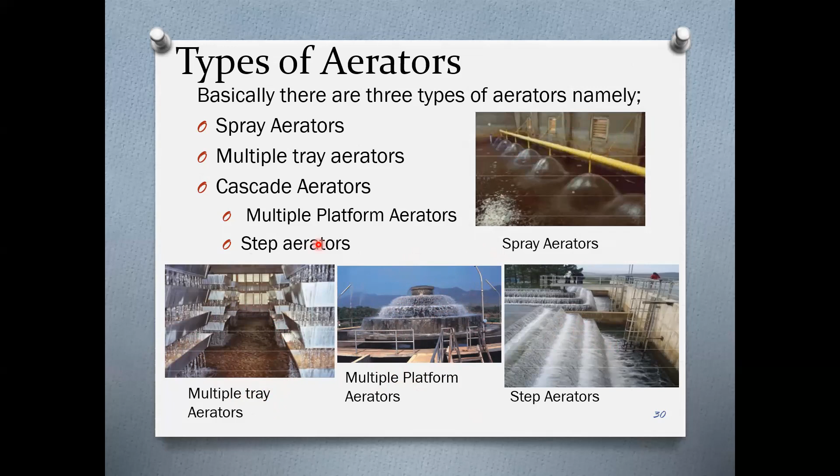Now let us talk about the first step, coagulation. The objective of coagulation is to turn the small particles of color, turbidity and bacteria into large flocs, either as precipitates or suspended particles. The basic idea is to make small particles into large particles so that they can be removed by gravity and filtration.

Coagulation is defined as a method to alter the colloids so that they will be able to approach and adhere to each other to form large floc particles. By doing coagulation, we support these particles to glue together. A group of chemicals called coagulants are added to induce particle agglomeration to create the above described coagulation. So we add a group of chemicals to accelerate this agglomeration. We call this process agglomeration, okay, to create the above described coagulation.

Right. Move further. Now, these things we have discussed before, but I think this picture will explain it better. There are 4 types of solids from soil in water. Now you can see floating solids are there, which float on water. You can easily remove them with filters or skimmers. Then there is something called suspended solids here, which are suspended between water particles. And there are solids which are called settled solids. These can be settled using grit chambers or gravity.

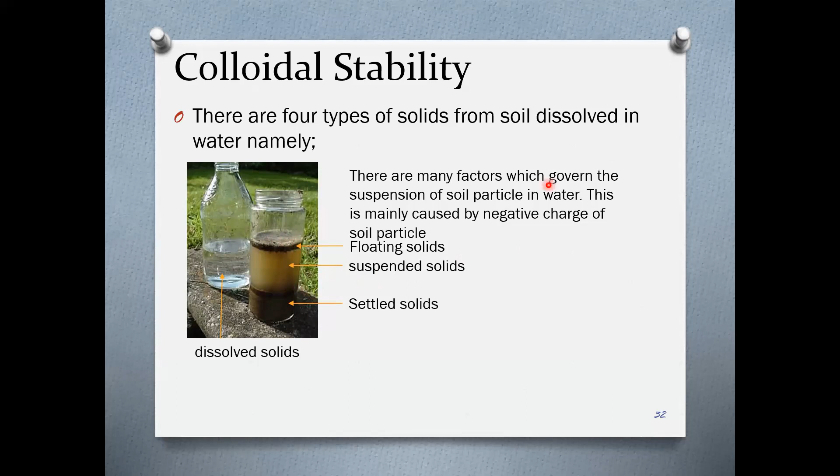Now, if you move further, we'll talk about the negativity of soil particles. If you look at the negativity of the soil particles, basically they contain aluminum or magnesium with silicon. And the orientation will result in soil structures like platelets or solids or things like that. Basically they are in the form of silicate tetrahedrons or metallic octahedrons. And you can see it here.

Now, according to this, you can see the positive cations are inside, the negative anions are outside. When the crystals are created from such structures, the negative things will be on the surface and the positive cations are inside. So generally, the clay particles are of negative nature, right? Even octahedrons produce similar things.

So if you read this, the negative charge helps colloids to be suspended among water molecules. If the negative charges are destabilized, particles can flocculate and settle easily. Such neutralization can be achieved by adding cations to the solution. Now, what you have here is a negative particle. If you have another negative particle here, they will repulse each other. And due to this repulsion, they will suspend in water.

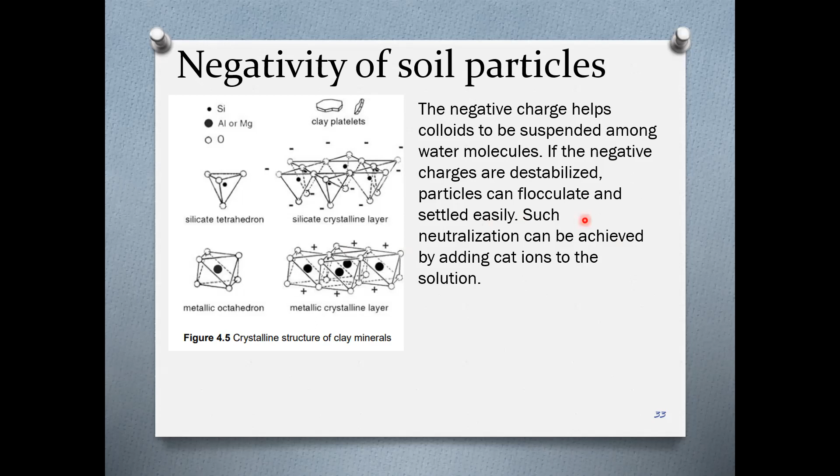And the suspension forces are so great that for these small particles, gravity is not enough to settle them down. So if you can neutralize these negative charges, you can simply allow them to glue together and come down. Basically, we use cations as coagulants to neutralize this surface charge. Now, let's briefly talk about the effect of valency and cations on the negative charge of soil. I will allow you to read it for 1 minute. Please read.

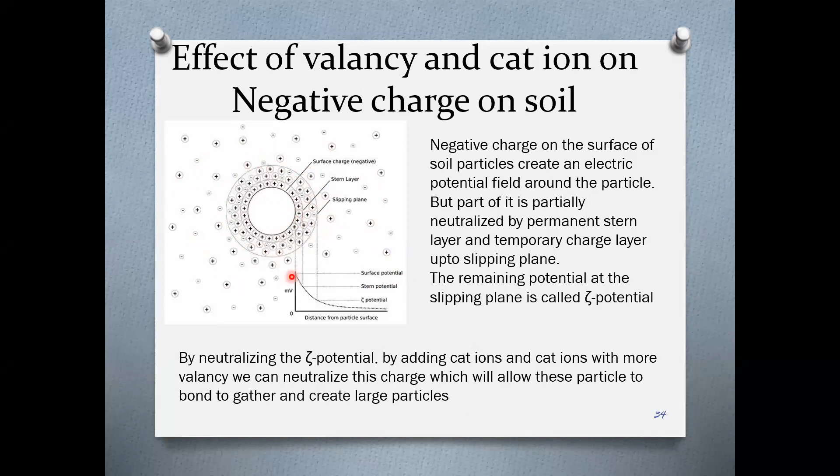You can see electric potential moves down with valency, and here you can see valency plus 3 reduces electrical potential quickly with the distance. That means what we are referring to is this. If you put cations with valency 3 plus, what you get is the zeta potential will move quickly. It will reduce quickly, right? So that is what it shows here.

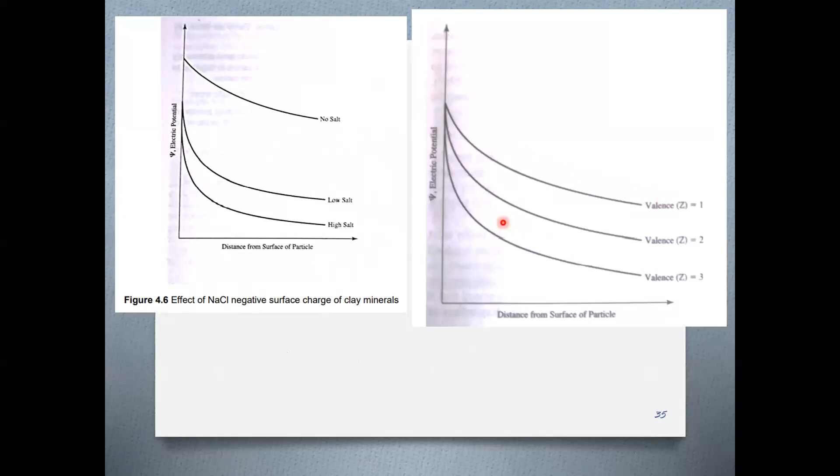Okay. Now, if you put sodium, it will move like this. If you put magnesium, it will move like this. Likewise. So we have to select a coagulant with that in mind. Okay. So I'll give you 1 minute to read this slide. Please read it.

Okay, let's read it, right? The substances that we mix to neutralize negative charge and create flocs are called coagulants. There are 3 properties of a coagulant. Basically a coagulant should satisfy these 3 properties. It should be a trivalent cation. It should be non-toxic, obvious for safe drinking water production.

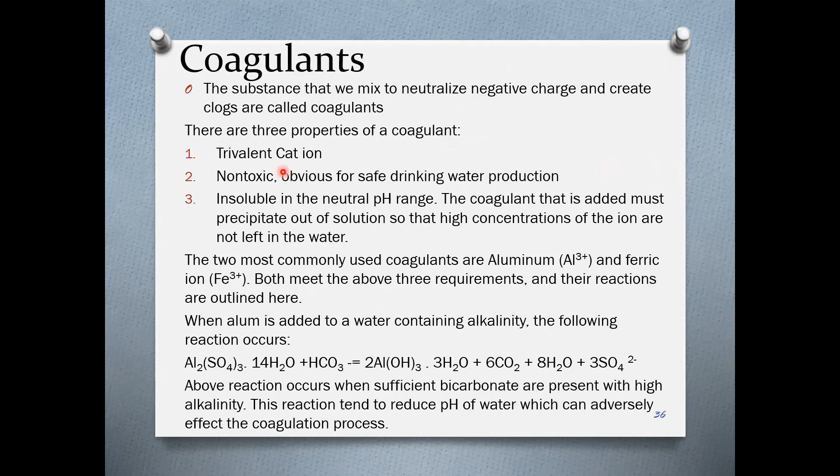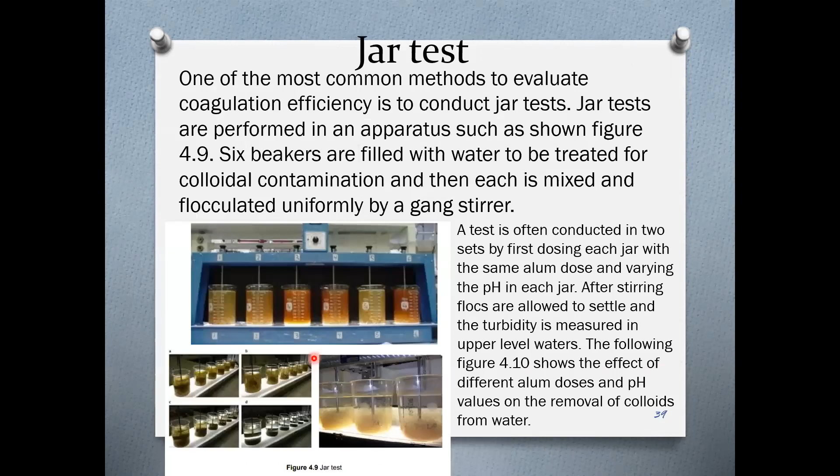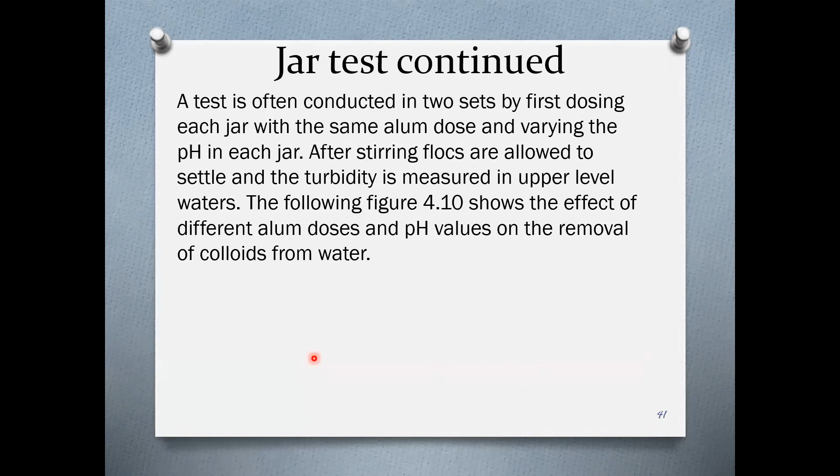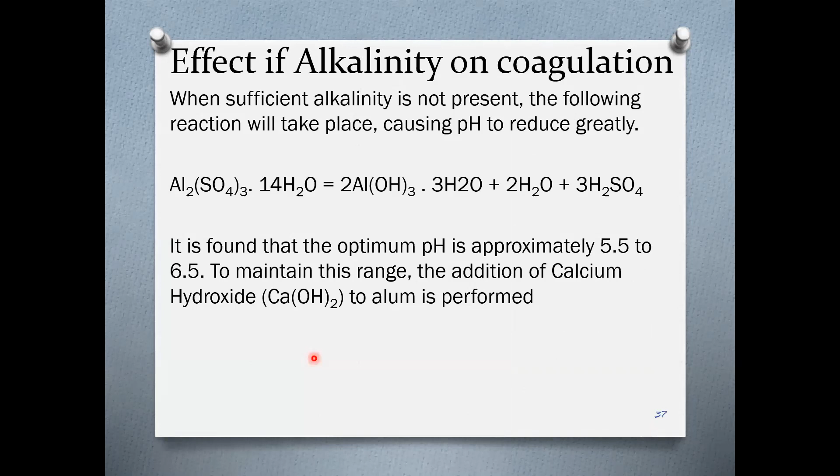Now let's talk about flocculation a little bit. See how many slides are there. Jar test, stability of water. Yeah, so the time is not enough for today, right? Jar test, stability. So we will stop here, right? We will talk about coagulation and flocculation and various things in the next class. Okay, thank you very much.